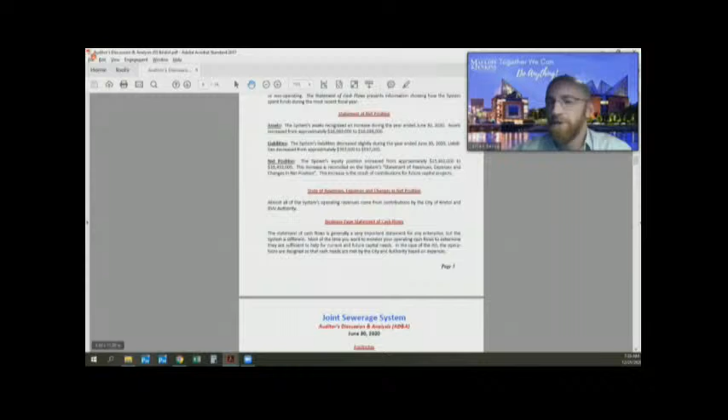At this point, I'm going to flip over to the financial statements. For an entity like a full accrual entity like yourself, most people tend to look at the cash flow statement to gauge how the year went. You're a little different in that you don't carry a cash balance, but it still gives good feedback on how the year went. So you'll see our cash flows from this year.

We ended up using about $1 million in our operating activities, and that is ultimately supported by some grants we've received, as well as capital contributions from the cities. At the end of the year, since we don't carry a cash position at the authority, the ending cash was net to zero, which is typical.

As part of the audit, we also issue a compliance report, which includes results of any findings or deficiencies in the internal control structure. This year, as in the past, we've issued our Yellow Book report, and happy to announce we did not have any material weaknesses reported. So the internal controls and accounting function are working materially correct, allowing the financial statements to be presented materially correct.

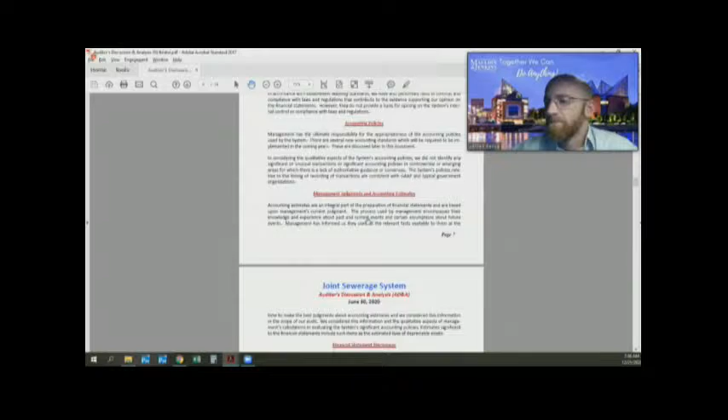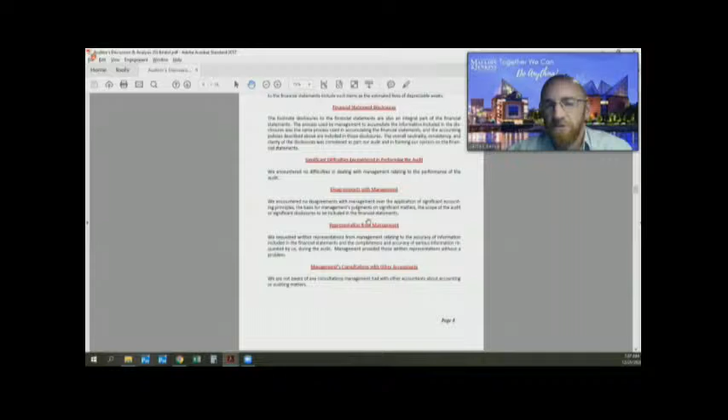On page 8, a couple of items we want to pull out: as part of the audit process on pages 8 and 9, for those who haven't gone through an audit, we provide a list of items we need information on from management. This year's audit was conducted mostly remotely. An audit is always an interesting experience—we ask for a bunch of information, get what we need, and then ask more questions as we dive into the details. We appreciate management's responsiveness and cooperation in getting us the information needed to conduct the audit, and we did not have any disagreements or difficulties working with management.

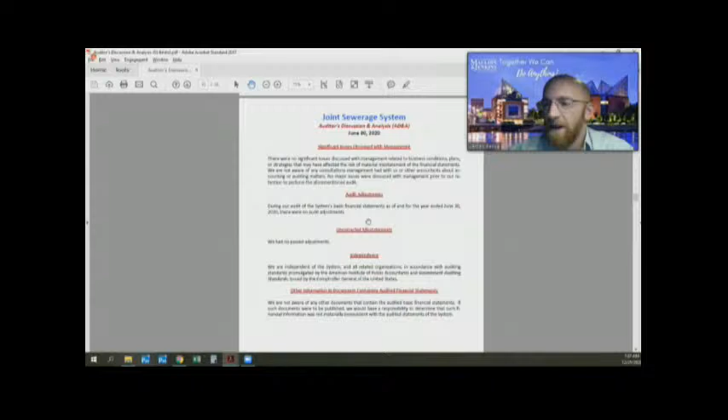Through the audit process, we didn't have any auditor-proposed adjustments required. As noted a few pages back, we did not have any material weaknesses in internal controls, and it's also a good feather in the hat that we did not have any auditor-proposed entries. That means the financial statements were materially correct and unchanged from the time we received them.

Starting on page 10, there are several pages I'm not going to read through in detail, but to highlight: GASB, the accounting standard-setting body for the sewage system, has been very busy, I guess is one way to put it. We've got about 10 to 12 standards coming out in the next 3 years that may or may not be applicable to the system as it moves forward.

GASB 95 came out this year due to the pandemic and essentially deferred any implementations required for 2020, pushing them into at least 2021 and moving forward. There are several different standards we try to work with management to make sure they're aware of, at the start of fiscal years and as they become required to be implemented. We always want to provide that information to governance, because the decisions you make can change what's not currently applicable and make it applicable based on board decisions. So we provide the information.

GASB 87 is really the biggest hot topic item for most local governments. It's probably not really going to affect you, but again, with GASB 95's deferral, this has been postponed until fiscal year 2022 for you all. So not as urgent of a pressing statement as it was a year ago.

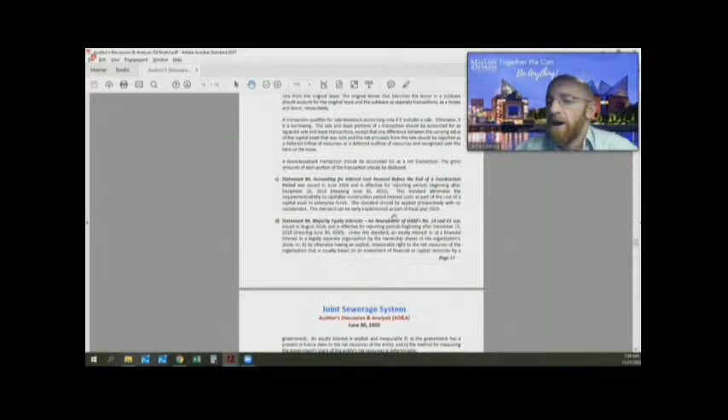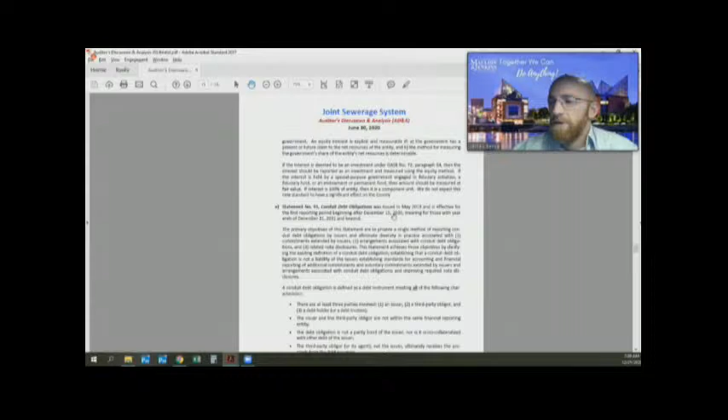But there's several pages of these. So again, we try to provide that information to you all, but as part of our process we always try to work with management to make sure they're aware and trained up on what they need to do from an accounting standpoint. So with that, that's the results of this year's audit. If you have any questions, I'd be happy to entertain them.

Do we have any questions for James? Okay, this item does not require an official acceptance. This is more of a reporting type function. So if there are no questions for James, we'll move on to item B under new business. James, thank you very much.

Thank you all. Okay, under item B for new business, we have a proposed construction contract for repairs to final clarifier number 4. Bids were opened on November 16th, and we have an apparent low bidder. Will Witcher, Utility Services Manager, will detail this issue. This item will require a vote, and Matt, if we could do a roll call vote at the end of the presentation and discussion, I'd appreciate it.

Thank you. Yes, this is final clarifier number 4. We are currently in the process of rehabbing and replacing the mechanical components of clarifier number 3. We had similar bid response to clarifier number 4 as we did to number 3, with W&O Construction Company of Livingston, Tennessee as the low bidder. The bid amount was within budget, and we have had good success in the current project with W&O. The plan is to present this to council for their approval at the January meeting, and then we will issue a notice of award and notice to proceed once that's been approved.

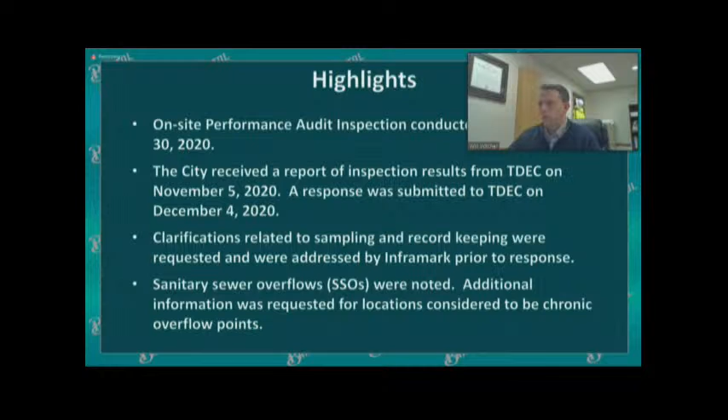They noted in their report that there were 2 points within our collection system identified as chronic overflow points — a location where there are greater than 5 overflows within a rolling 12-month period, based on once that period completes, previous overflows roll off. We had 2 chronic overflow points during this period: Sinking Creek Pump Station and Tri-County Industrial Park Pump Station.

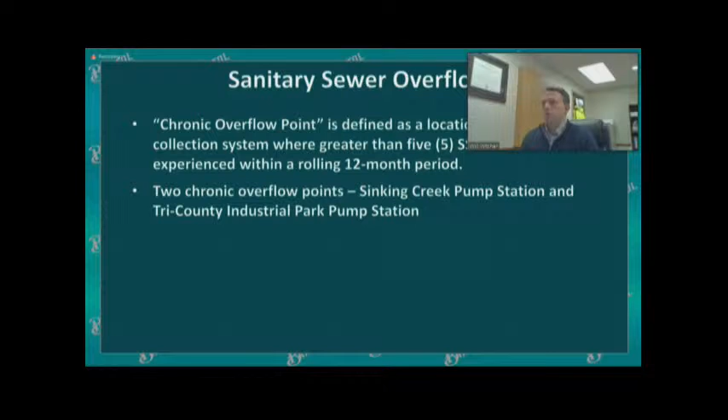I'll talk about Tri-County first. It's located in Piney Flats and basically collects wastewater flow from the industrial park area east of Highway 11E. It's important to note that the Piney Flats Basin also collects flow from Bluff City — all of Bluff City — and a portion of Johnson City's collection system. So in addition to Bristol, Tennessee, there are other entities in play here. The Lakeview Pump Station ultimately collects all the flow from Piney Flats.

The Lakeview Station — if you drive across the 11 bridge and look to the west, you can see it down there on Boone Lake — basically collects all the flow from that basin and pumps it to our gravity system up by the Speedway.

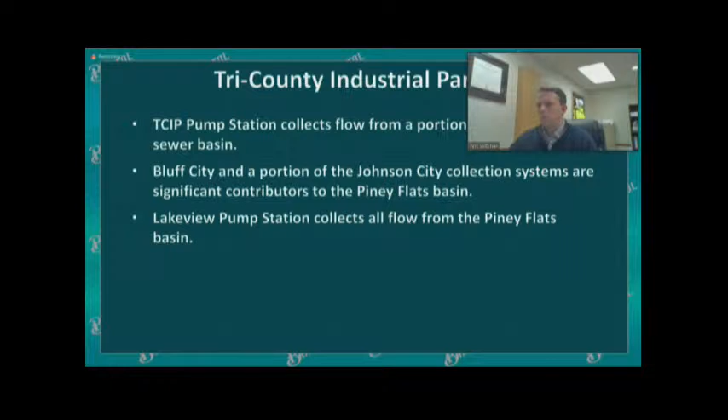I believe we had 7 SSOs at Tri-County in the 12-month period when the audit was performed. Currently, we have dropped one of those off. We are currently sitting at 6. It's important to note that in February, 3 of those 6 overflows will roll off, and hopefully we'll be okay for the next 6 weeks or so, and we can get 3 of those to drop off.

One thing I did want to mention is about Tri-County. Tri-County, as we discussed, is a contributing pump station to the Lakeview Station. So all the flow collected at Tri-County from the industrial park is pumped to the gravity system, which ultimately discharges to the Lakeview Station on Lakeview Drive.

We had a study performed a few years ago by J.R. Wauford and Company, consulting engineer, on the Piney Flats Basin. One of the things they noted is that for one reason or another, the Tri-County pump station had a hydraulic pumping capacity that was greater than the Lakeview Station. So effectively what this meant is that the Lakeview Station is a bottleneck in the system.

And the way that the system has been operated to mitigate that is that if we have an imminent overflow at the Lakeview Station, the Tri-County Station will be shut off temporarily in order to allow the Lakeview Station to catch back up and to avoid an overflow at that location.

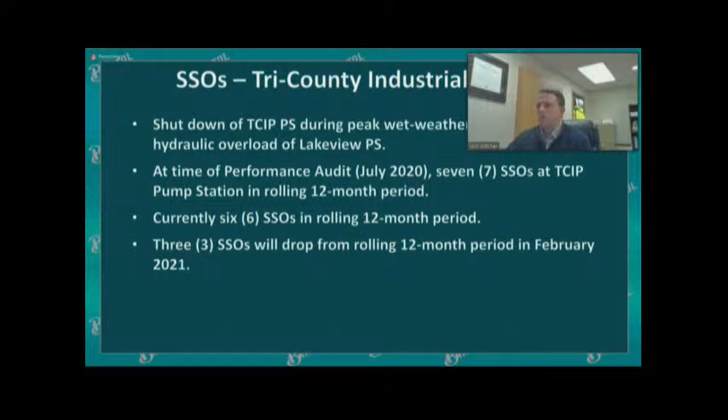And the state is aware of this. We discussed this with them on occasion, and they are aware of the issue. So in order to mitigate that, the first thing that we did this past year is we completed a $1 million upgrade to the Lakeview pump station, which basically increased the pumping capacity at Lakeview to handle all the current flows, including wet weather flows within the basin.

The existing conditions at Lakeview, we have 3 pumps. We now have 4 pumps. One of the original pumps was replaced with a higher capacity pump, and a 4th pump was added. So since these upgrades have occurred, we have had no overflows at the Tri-County Station. We are confident that this project will help to significantly alleviate future issues with overflows.

A second issue that we've identified is a trunk sewer line along Mountain View Drive within the Tri-County Basin, which is subject to significant inflow and infiltration. We are looking at programming that into the CIP to replace that line to basically mitigate the I&I to the Tri-County pump station.

Before I move on to Sinking Creek, are there any questions related to Tri-County pump station and Piney Flats Basin? Yeah, Will, I have one. Is this primarily due to growth, or is it mainly due to the wet season we had? Or a combination, I guess.

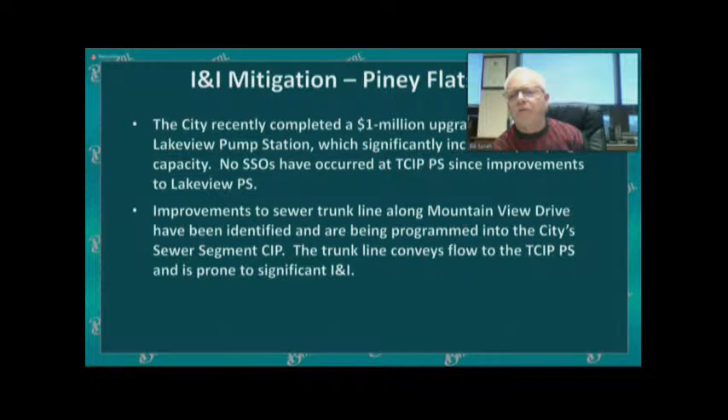He's going to give you the flow data there and illustrate this by tying it back to wet weather events. So I think you'll begin to see the cause and effect as we move into the Sinking Creek station analysis. Okay, thank you. Are there any more questions on the Piney Flats Basin before I move on?

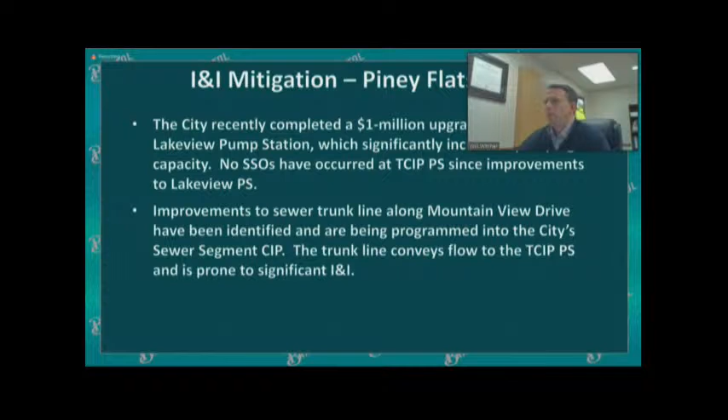The Sinking Creek Basin - for those of you who aren't familiar with our collection system, the Sinking Creek Pump Station is the downstream collector of the Sinking Creek Basin. It's located off of Old Jonesboro Road at the intersection of Paperville Road, near the Tulip Grove condominium development.

Basically, the Sinking Creek Basin is a large basin. In the city of Bristol, Tennessee, our collection system basically east of King College all the way out to the Country Club and Terra Hills, Middlebrook area, is part of the Sinking Creek Basin. On the Virginia side, portions of East Bristol, Virginia, including areas around Old Airport Road and Bonham Road, are part of the basin. And then a significant portion of Washington County Service Authority's basin, extending up Old Jonesboro Road, including the Virginian and some of the rural areas up to exit 10, are part of the Sinking Creek Basin.

So the Sinking Creek Pump Station, which the city of Bristol, Tennessee operates, collects sewer flows from this entire basin. We've given some statistics on the average flows and the wet weather flows measured at the pump station. The city of Bristol's portion of the dry weather base flow is about 275 gallons per minute, which is about 80% of the base flow. The combined flow from BVU and Washington County portions of the basin is about 75 gallons per minute, which comprises about 21% of the flow. So we see a total base flow of about 350 GPM, and this is just dry weather flow without rainfall included.

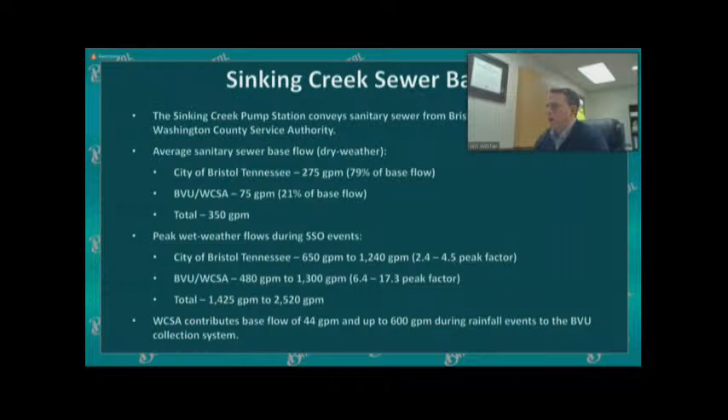Information we've received from BVU shows that Washington County contributes about 44 GPM of base flow and up to 600 GPM during rainfall events. That's a significant number, that 600, because that could mean the difference between an overflow or not. So we'll discuss that here in just a little bit.

At the time of the audit back in July, Sinking Creek had 8 overflows within the rolling 12-month period. Currently, 2 of those have rolled off since July. We're at 6 at the moment. And 3 of those will roll off again in February.

We had 3 overflows basically within the second week of February, from February 6th to 13th. If y'all remember, we had about 4 inches of rain in about a 1-week period. We experienced 3 SSOs at that location in February. So again, if we can make it this next 6 weeks, we'll be in pretty good shape, and 3 of those will drop off.

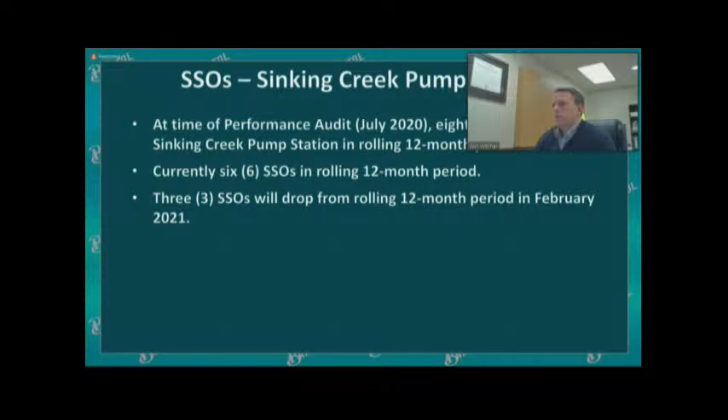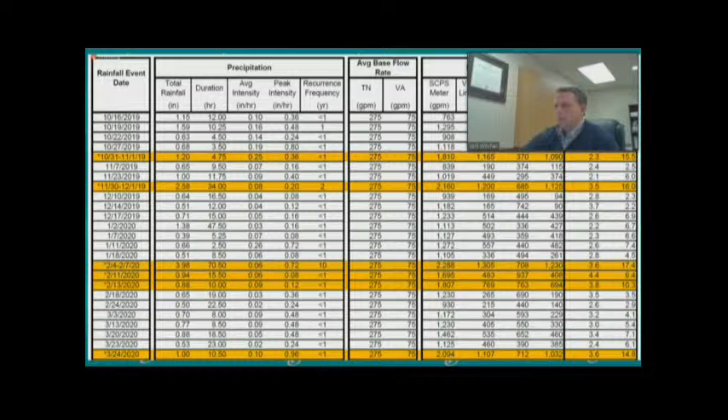And as we talked earlier, we've noticed, and BVU I'm sure can back us up on this, Washington County, Virginia is a significant contributor to the I&I problem we have in the Sinking Creek Basin. And then this is the data from the rainfall. We had 2 overflow events in April, showing a similar situation, very high peaking factors from the Virginia side. Are there any questions on that information? I know that's a lot of data to look at.

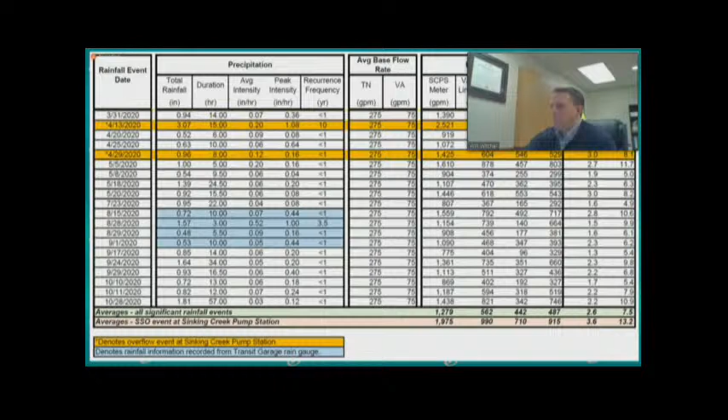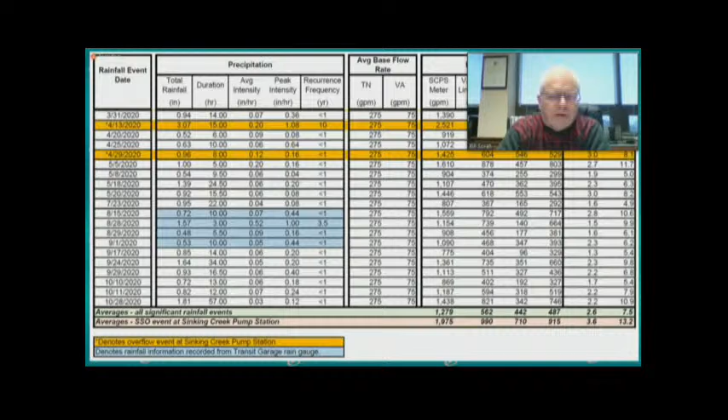I think the important thing to talk about at this point is going forward, what measures are in place in terms of strategies to mitigate the high flows, and then perhaps more importantly, the funding and the timeline for implementation of those plans. Will, are you addressing that, or is Philip? I am, and Philip can feel free to jump in as well if he has anything to add.

I'll give you an update on the I&I mitigation that has been undertaken by us and BVU in Washington County. The city hired J.R. Wauford in 2010 to conduct a basin-wide assessment, and basically any deficiencies that were found at that time have been addressed by city maintenance staff.

We did hire WK Dickson and Company in 2017 to conduct a study on the Sinking Creek Pump Station and provide alternatives that can either increase the capacity of the station or mitigate I&I problems in the basin. One of those items identified by WK Dickson was to basically remove as much of the contributing flow from Virginia as possible, which we'll discuss here in just a minute.

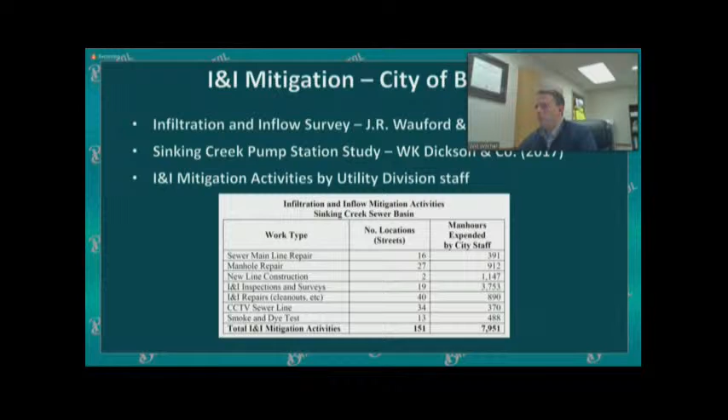That chart just kind of gives an idea of the man hours that the city's devoted to addressing issues in the basin here. We've basically spent 8,000 man hours in the last several years to address this problem.

And this information came from BVU. I appreciate Philip and his help in providing this information for us. BVU has done a significant amount of work on their side of the basin as well, including flow metering, smoke testing of lines, replacing sewer lines, and then replacing many of the leaking manholes with watertight frames and covers.

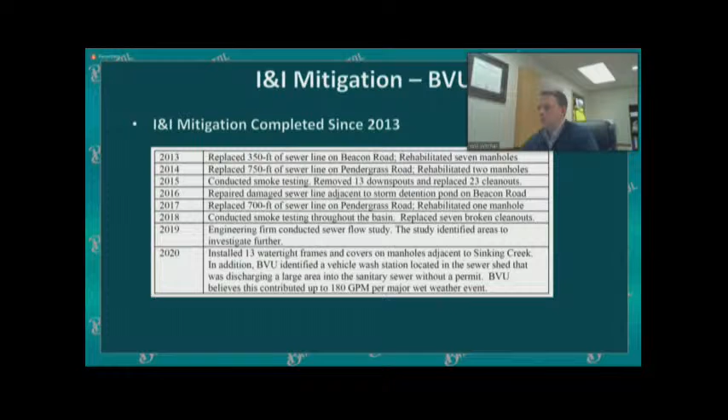And we've noticed a significant improvement this year during rainfall events, whereas in previous years, certain rainfall events probably would have triggered an overflow much more quickly. We've had a few rainfall events this fall that have not resulted in an overflow, where in the past we probably would have seen an overflow event. I think the watertight frames and covers that Philip has put in have been a big help in that.

And this is a chart that Philip provided. This is plan I&I mitigation in the BVU basin. Philip, do you have anything to add to what you guys are showing here as your planned work?

I know you did mention that you found a significant inflow location at the VDOT maintenance garage. Is that right? Yeah, we found a VDOT storm drain connected. A large storm basin was connected directly to our sewer system. We're working with VDOT to get that removed. On top of that, we're doing a comprehensive manhole rehabilitation throughout the sewer shed.

We're currently inspecting the manholes to be upgraded. We started that last week. We received a significant grant, $50,000, to help fund that, and BVU will contribute an additional $100,000 for that.

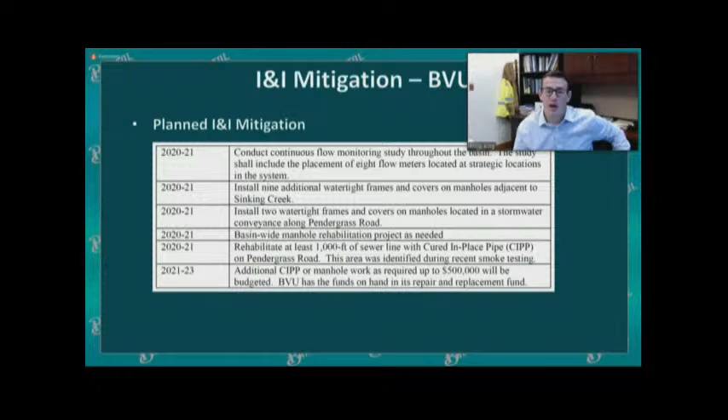We've also been more aggressive on our camera work during rainfall events. So any day that it rains, we go out there with a camera and start videoing the lines, and we've already seen an impact. We found 2 locations that need to be repaired. We'll get that addressed by this spring. So we're definitely addressing it in a very aggressive manner.

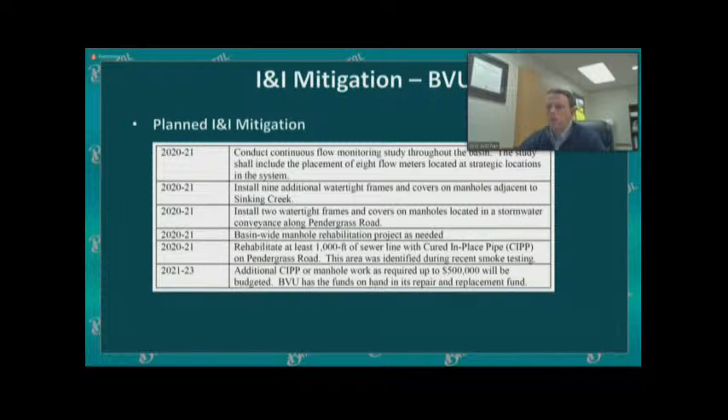Okay, thank you Philip. And I'll just touch briefly here. I would like to thank Robbie Cornett at Washington County Service Authority for his help. They were very helpful in providing information to us as part of this response, as was Philip at BVU.

In addition to installing watertight frame and covers on their portion of the system that lies along Sinking Creek and some of the flood-prone areas.

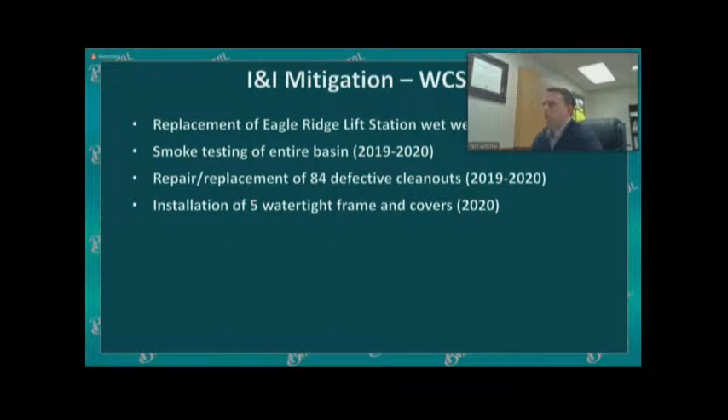I think the big thing to take away from this, though, is the information provided by Washington County is they're currently in the midst of an $18 million project to remove all of their contributing flow from the basin. They received a grant from USDA Rural Development, $18 million, to extend sewer service to much of their service area. Part of this will be the construction of a lift station along King Mill Pike at the lower end.

of their portion of the Sinking Creek Basin, which will pump all their wastewater flow back to the Abingdon wastewater treatment plant. And based on information we've received from Washington County, that project is currently under design, and construction is expected to be completed by fall of 2023.

So we think this is a big thing in getting excessive inflow and infiltration off of Sinking Creek pump station. Certainly we still have work to do on our side of the basin, and we are continuing to push forward to identify areas that need to be mitigated. But we think this project is going to go a long way in taking care of I&I issues, particularly overflows at Sinking Creek pump station.

And I just want to reiterate that during the 3 overflow events during February, the Washington County trunk line was underwater during that entire time. So it definitely had a significant impact on that.

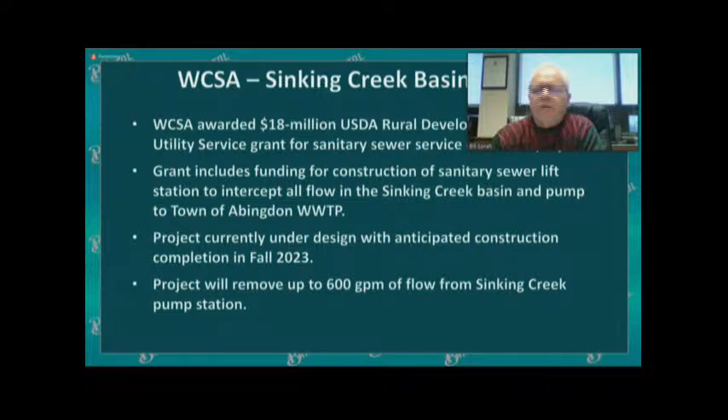I think as far as the Tri-County Basin, that has been addressed. But it's very important, especially when you have three political subdivisions discharging into one basin, that all three systems are putting forth the necessary maintenance to address inflow events in that collection system.

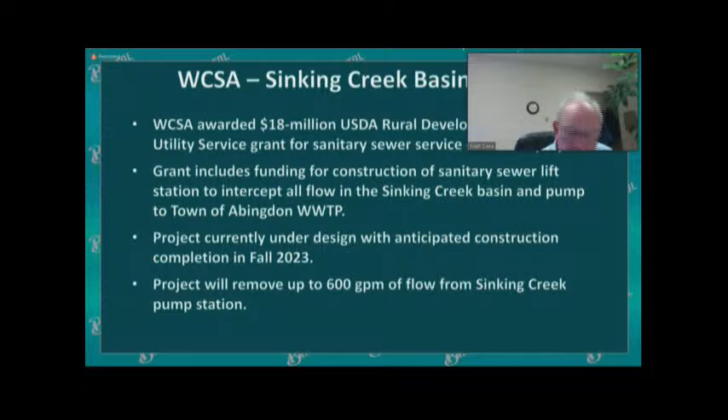Plant operations report. This report covers the period September, October, and November.

Effluent quality: the effluent BOD averaged 11 milligrams per liter, an 89% reduction. Effluent TSS was 10 milligrams per liter, a 92% reduction. To put that in perspective, the limit is 30 milligrams per liter on a monthly average and 45 milligrams per liter on the daily max, so we were well below that. Percent removal requirements are 40% daily and 85% monthly average, and we were well above that as well.

So that's good. Flows averaged 10.8 million gallons per day for this 3-month period, giving us a 12-month moving average of 14.2. The plant design is 15 million gallons a day, so we're still bumping up against that, all due to the rainfall and wet weather mentioned in the previous report. We've had 3 record-setting years, and flows are still real high from that.

We didn't have any overflows at the main lift station, although I mentioned in this report that we had 3 when I wrote it, but on December 1st one of those rolled off, so we're now at 2 overflows for the 12-month period. I think we have 2 in February, the real wet month we had earlier this year.